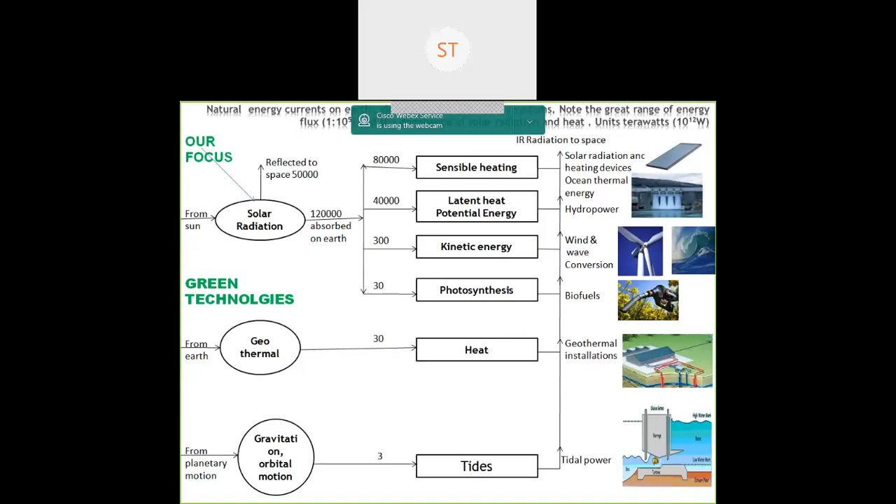What are the green technologies? It could be tidal power, could be geothermal installations, as shown here, or whatever derives from solar radiation - through sensible heating, solar PV or solar thermal energy conversion; through latent heat, potential energy, hydropower, wind, and so on through kinetic energy; through photosynthesis or biofuels. Our focus is going to be on solar PV.

Surendra sir, your voice is a little lower, sir. Okay. My voice is lower, is it? Yes sir, now it's fine, sir. Okay, somebody has given an annotation request. What is that? I request the participants please not to disturb the speaker and not to try any extra buttons here, please. Okay.

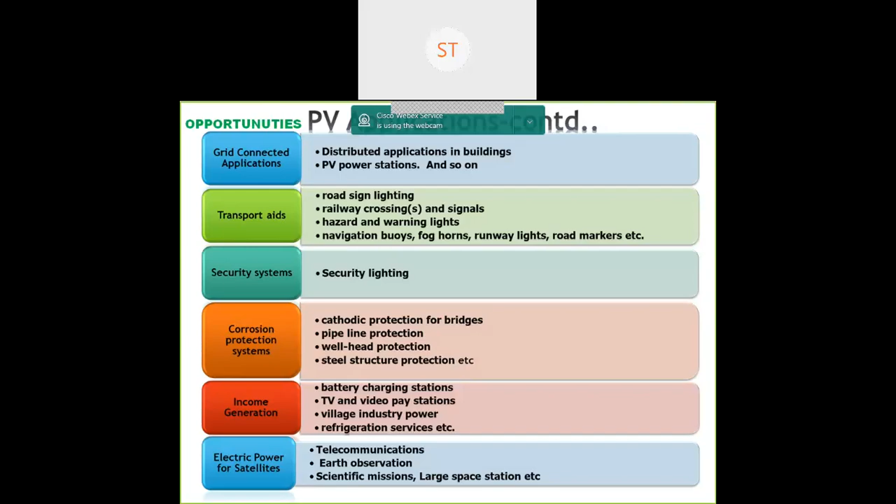Yes, for COVID-19 when they come up with a vaccine for the rural areas, well, you know where to store it. Communications - radio reporters, radio repeaters, remote TV and radio. Agriculture - we talked about irrigation, pumping, livestock. Some more opportunities in grid connected applications - government has announced 100 gigawatts. Transport aids, security systems, corrosion protection, income generation, electric power for satellites. So I think the opportunities are there everywhere.

The government has set a 100 gigawatt solar power target by 2022. The sectors being targeted are residential, commercial, industrial, and institutional. Of course, rooftop solar PV 40 gigawatts, solar parks 20 gigawatts, entrepreneurs and unemployed graduates 20 gigawatts, and ongoing programs at 20 gigawatts.

Various incentives are there - interest subvention, accelerated depreciation, subsidies, feed-in tariff, and so on. I think opportunities are galore.

If India has to meet this target of 175 gigawatts, you have to step up the pace in terms of installation. You have to beef up our facilities. You require more EPC contracts. That's where the market is.

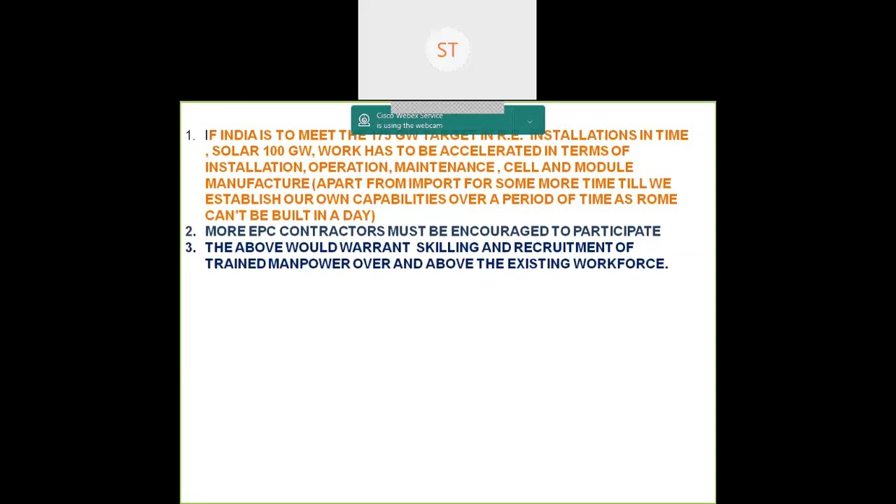But this will also involve skilling - a lot of skilling required, training required. So you'll have to train a lot of men. This would give a fillip to the trainers already there, skill development, skilling institutes. And all this would translate to enhanced job opportunity.

This is a great opportunity to make in India, with support from the government at the center and states. After all, China is what it is today only with government support in terms of financing and favorable policies.

I think big ticket manufacturers can start - especially Adani, Azure, Tata Solar, Indra, Reliance, and so on. India will also be able to meet her climate change obligations.

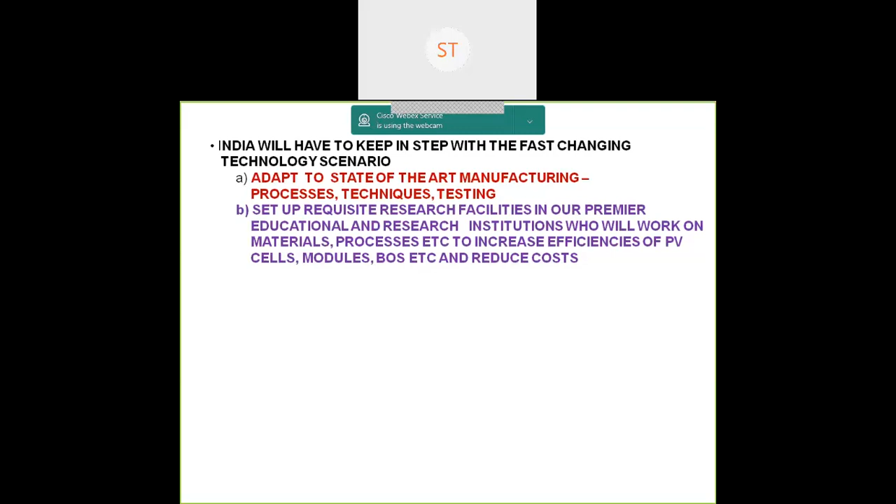But India will have to keep in step, sync with the fast changing technology scenario. You have to adapt to state of the art manufacturing techniques and processes. We have to set up requisite research facilities - educational and research on materials, processes. You have to encourage entrepreneurs.

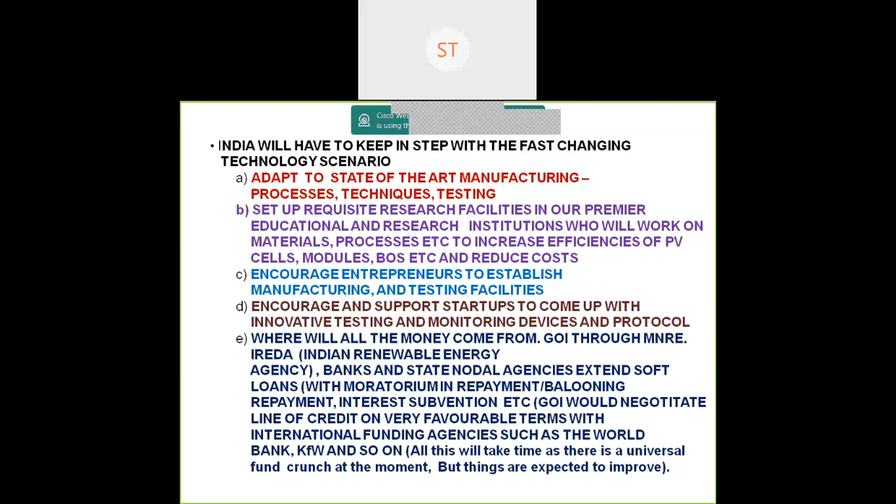Help or support - GOI, the Government of India, could negotiate line of credit on very favorable terms. The international funding agencies, such as the World Bank, KfW, and so on. All this may take time, could be a temporary fund crunch, but things are expected to improve.

The macro trends, opportunities for all - revamping and repowering. When you say revamping, after all, PV systems have been installed years and years ago, 25, 30 years ago. So obviously some subsystems, some components will be malfunctioning, right? These could be replaced, some things could be re-engineered, some of them could be off-spec. So here is an opportunity for revamping and repowering.

Utility scale storage - today, when you talk about grid connected systems, storage is important, has assumed significance. Storage plus grid connection. Obviously, battery technologies have got lithium ion, flow batteries, sodium ion. In fact, some party in India, in collaboration with somebody in UK, set up sodium ion.

Hybrid systems - already we hear of wind, solar, biomass, and so on. This is where someone who doesn't want to go and soil his hands in the field can use digitalization, which means big data analytics, artificial intelligence, IoT, Internet of Things, connected small objects, robotics.

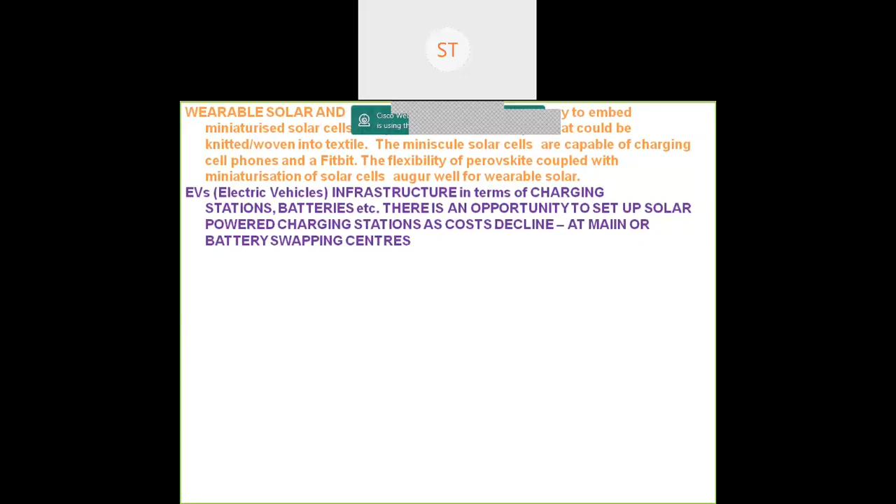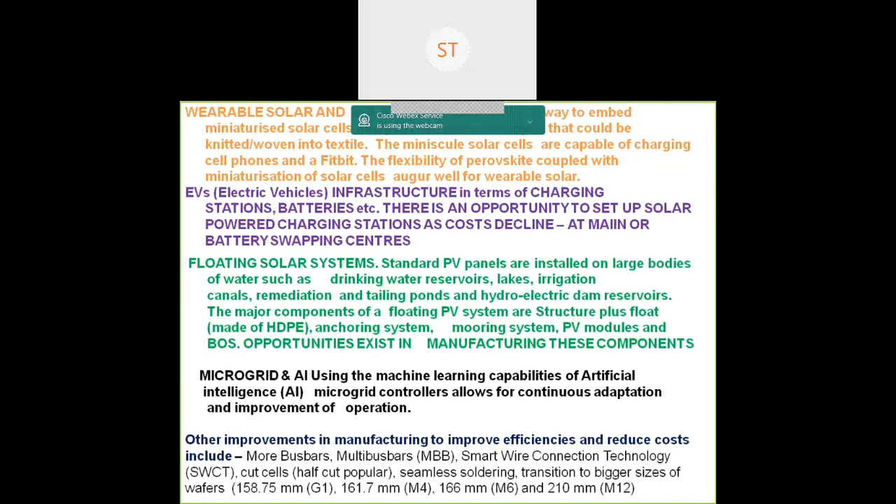Microgrids, artificial intelligence, and using the machine learning capability, AI. This has become the in thing today - AI, various things. When you talk about technologies, you're all aware of this.

PV module is silicon-based and non-silicon. Silicon, of course, could be crystalline silicon - monocrystalline silicon or polycrystalline. I will not go into details. Thin film could be amorphous silicon or multi-junction.

Today we are talking about heterojunction. This was pioneered by Sanyo long back - they talked about HIT cells, heterojunction with intrinsic thin layer, HIT. This means they have a crystalline silicon layer sandwiched between two amorphous layers. This gives very high efficiency. So today, a lot of effort is going into heterojunction - that could be the next best thing.

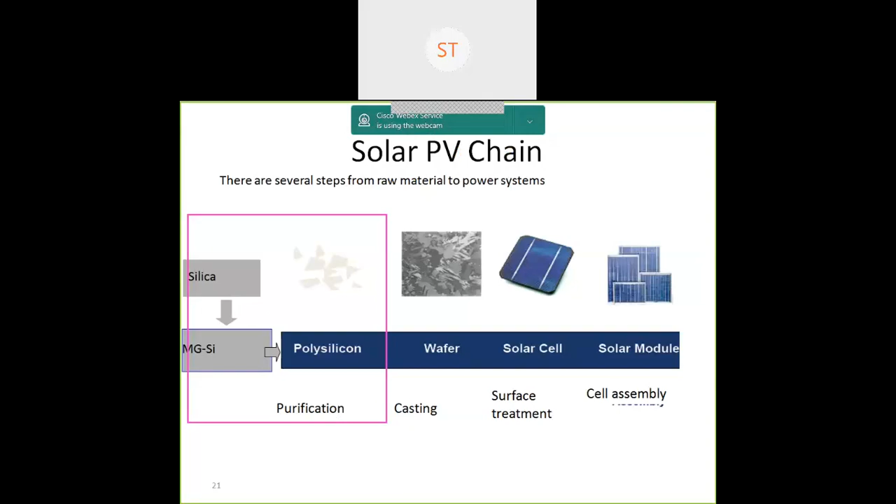So there are opportunities for all of you here. This is traditional wafer, cell, or module and so on.

So the question comes, what are the significant trends today? You all hear of PERC, passivated emitter rear contact monocrystalline cells. It gives you higher efficiency because it reduces recombination. This is used in conjunction with what is known as TOPCon, another way of passivating by introducing two other thin layers.

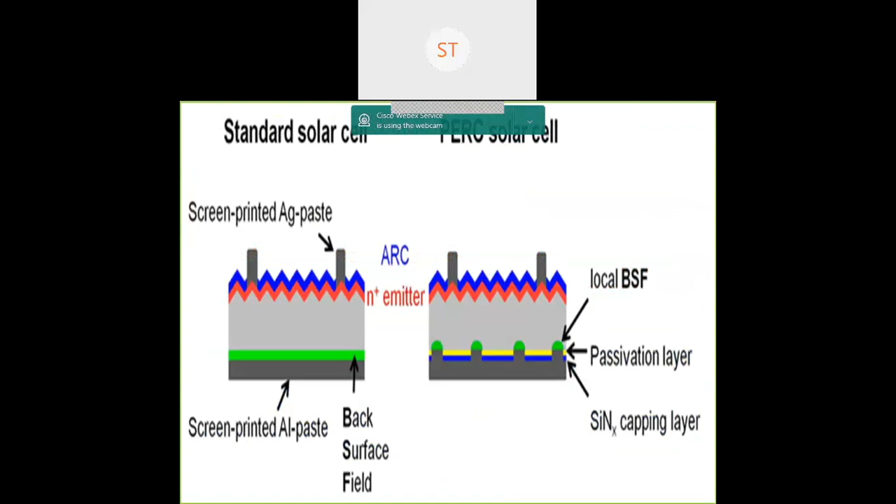Heterojunction we've talked about, Sanyo, Panasonic. Now, of course, the patent has expired, many people have jumped onto the bandwagon. China, Hungary, Italy, Japan, Russia, Taiwan, USA, Singapore. Just name it, they're there. This is to give you an idea of passivation that comes into play.

Now people today are talking about bifacial modules. So you can generate power from the front side, and now it also comes from the rear side.

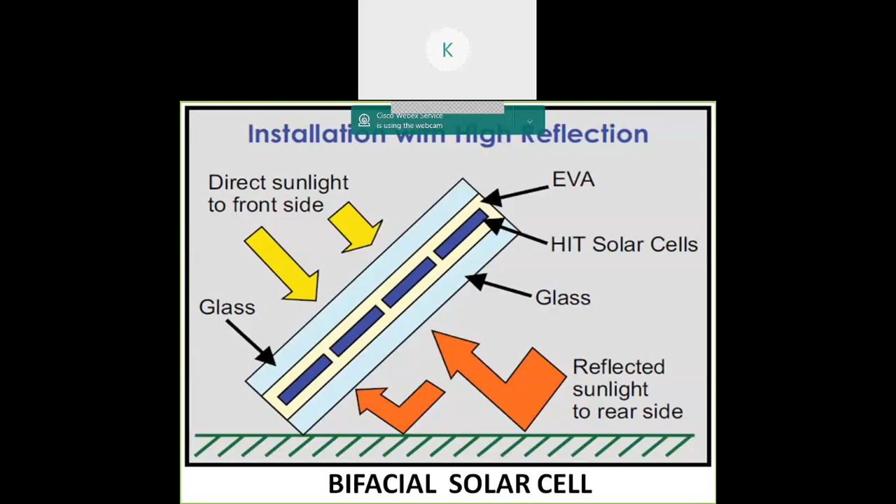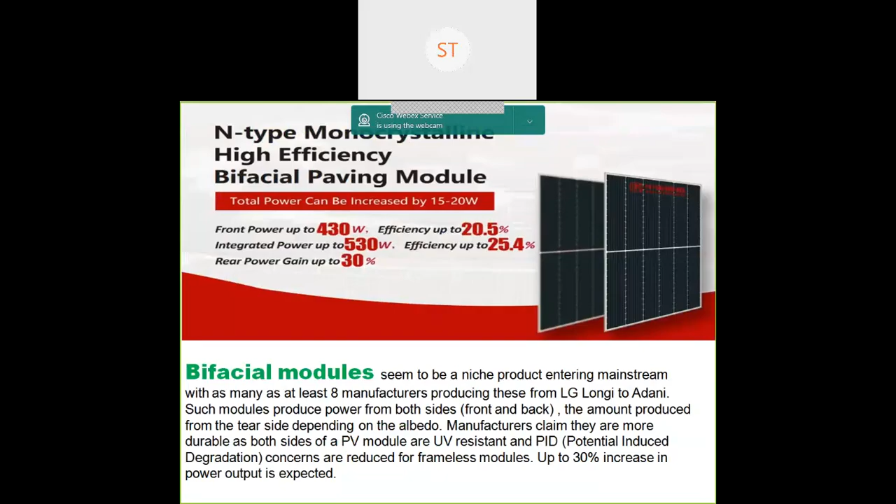Rear side, because you get the albedo, reflection from the ground. So both sides. The result: front power could be 430, integrated power could be 530. Efficiencies are 20.5 to 25.4.

My presentation will be incomplete if I don't mention perovskite, right? It is methyl ammonium lead halide - that's just one form, we later use iodide. This is going to be the future, I believe.

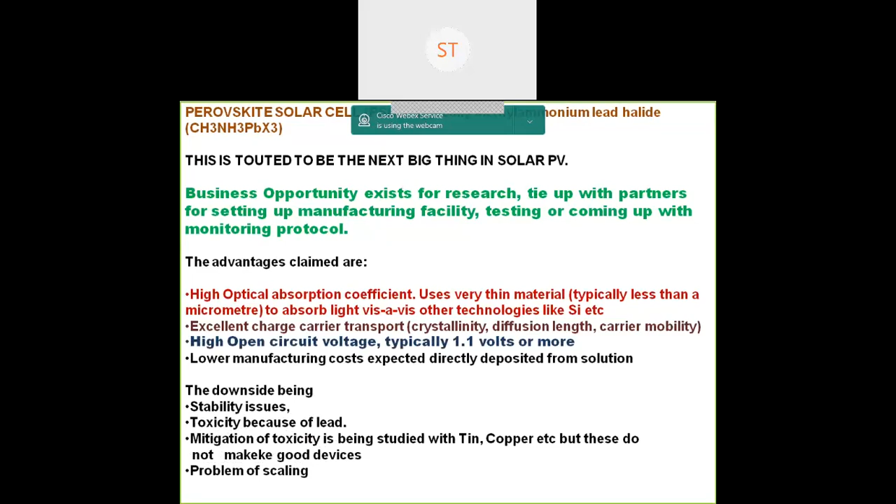But then there's always a downside which has to be addressed first: stability issues, toxicity issues, because you're talking about lead toxicity, problem of scaling. But these are being addressed in research labs. Very soon we're going to hear a lot more about perovskite in India as well.

You have a host of other technologies: dye sensitized solar cells, quantum dot solar cells, graphene based solar cells, tandem solar cells - meaning combination of perovskite and CIGS (copper, indium, gallium diselenide), perovskite and silicon, and so on. We are also talking about organic solar cells. Anybody interested in the details, you're welcome to contact me - I can give you references and even explain it to you if you're interested.

So the solar PV industry is experiencing plenty of changes across the entire value chain in terms of manufacturing, modules, materials, applications, O&M, decommissioning, and end-of-life management.

The new areas of application, apart from floating solar, is what is known as BIPV - building integrated photovoltaics. Solar trees is an interesting concept - you have a column, then you have stems, you have panels. They avoid shading; I think they call it phyllotaxy architecture.

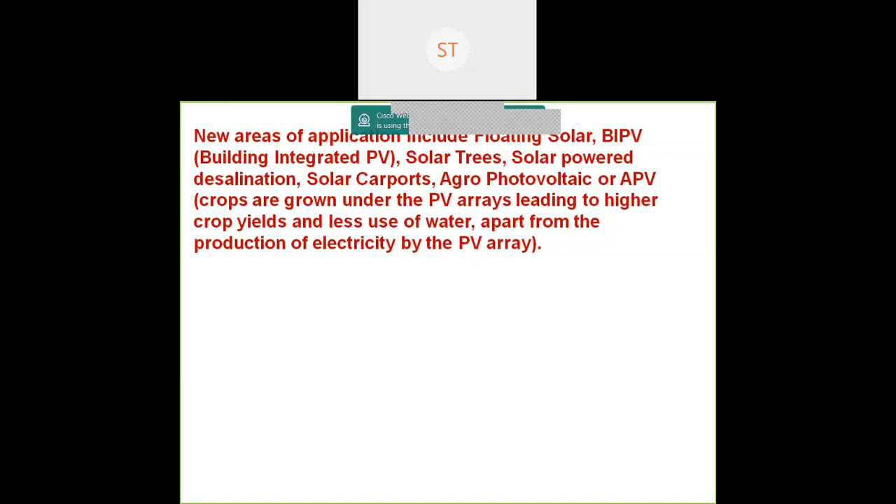Solar power desalination, carports, agrophotovoltaics - what is that? Crops are grown under the PV arrays. Yield is more, power is generated, you can feed it to the grid. So what happens? Farmer earns more. It's all farmer centric.

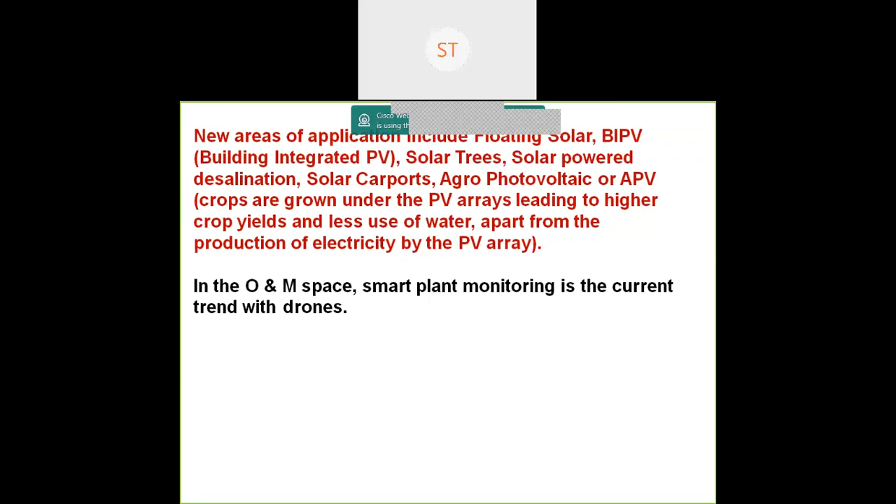In the O&M space, smart plant monitoring - I talked about IoT and so many things. I think digitalization is important. For power plant forecasting, IoT is a trend gaining wide acceptance, together with attempts for better and standardized communication.

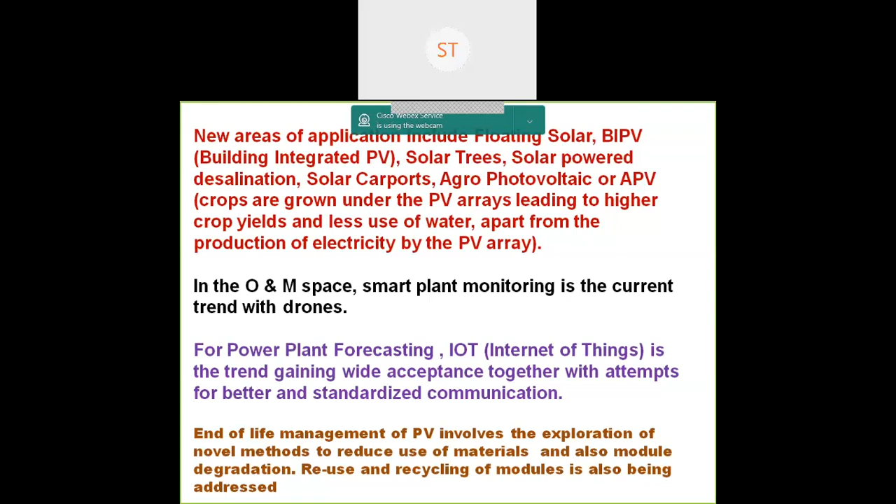We talked about end of life management of PV, right? You have to think of novel methods, reduce use of materials, also mitigate degradation somehow, and figure out how to reuse and recycle the module. This is in fact gaining a lot of momentum.

So in summary, post lockdown, it may take 2 to 3 quarters for some semblance of normalcy to be restored in terms of supply chains; workers' mobilization, all gone away, they have to be mobilized. You have to raise finances. Government have to be a little more liberal.

You have to get around bottlenecks, strategize partnerships and collaboration, get government approval, clear backlogs. It looks stupendous, but I think governments are out there to help. I heard the PM talk today about a 20 lakh crore package.

So I think once this transition is made, then we get back to business as usual for all manufacturers, system integrators, contractors. And business opportunities will abound, as I told you: setting up facilities by entrepreneurs, component manufacture apart from cell manufacture, and rendering software solutions, design.

PV plant performance monitoring, testing, EPC of power plants - just name it, it's there. Of course, the Government of India have announced ambitious targets for RE capacity addition, so there's ample opportunity for all of us. Wind and solar generation, energy, and of course due to problems of intermittency and fluctuations, battery energy storage has become very important.

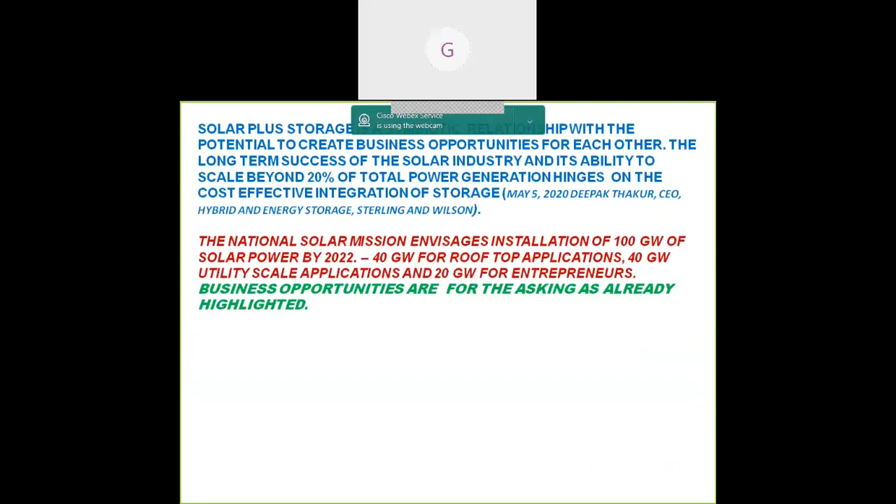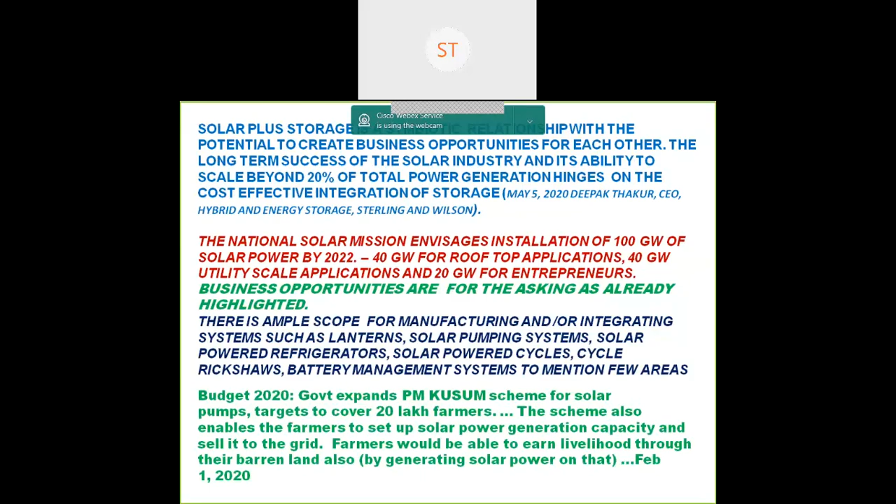So they say business opportunities are there for the asking. Solar plus storage we talked about, National Solar Mission we talked about. Scope for all these places: lanterns, pumping systems, solar powered refrigerators, e-cycles, e-auto rickshaws, battery management systems. And then of course, 20 lakh farmers to be given solar power, solar pumps. That's the PM Kusum program. So the farmers set up the solar power generation capabilities. We talked about agri PV. They can also sell part to the grid.

As a young citizen of India, armed with technology and love for my nation, I realize small aim is a crime. As entrepreneurs, startups, business people, think big, dream big. That is what Dr. Kalam had said.

So I think India is poised for the big leap in green technologies, particularly solar. Business opportunities - we talked about almost every sphere, every facet, right from research to installation, operation, maintenance. So I think it's time for entrepreneurs, startups, all of us to gird up our loins and embark on this fascinating travel into green technology. Mind you, India is looked upon with great respect world over for our initiatives in green technology. Yes, that's Bharat Ratna Abdul Kalam's quote I used.

Coming to this particular slide, this is the wake up call to set up more manufacturing facilities in India. India has set an ambitious target of adding 100 gigawatt of solar energy by 2022, and so far achieved only 34 gigawatt. Now due to this COVID-19 pandemic, it has been a wake up call for the domestic solar industry as it is heavily dependent on imports, but domestic manufacturing can be sustained only if there is profitability.

So here I would like to discuss: actually about 80 to 90% of solar materials we are importing from other countries, majority from China. During this COVID period, all the import exports have been stopped. Now domestic solar panels or whatever the things, domestic demand is increasing day by day. As much as 80% of the demand for solar cells and modules is met by imports from Chinese companies.

Therefore, the imposition of work restrictions by China due to this corona situation means all the materials have been stopped. The developers are facing a shortfall of raw materials, which is going to affect the installations in the first half of the coming year. Now a few companies have already opened, trying to install the solar system, but they are not able to get materials like inverters. There are no inverters available in the market. We have panels, we have some panel assembling units, but inverters and other materials are not available.

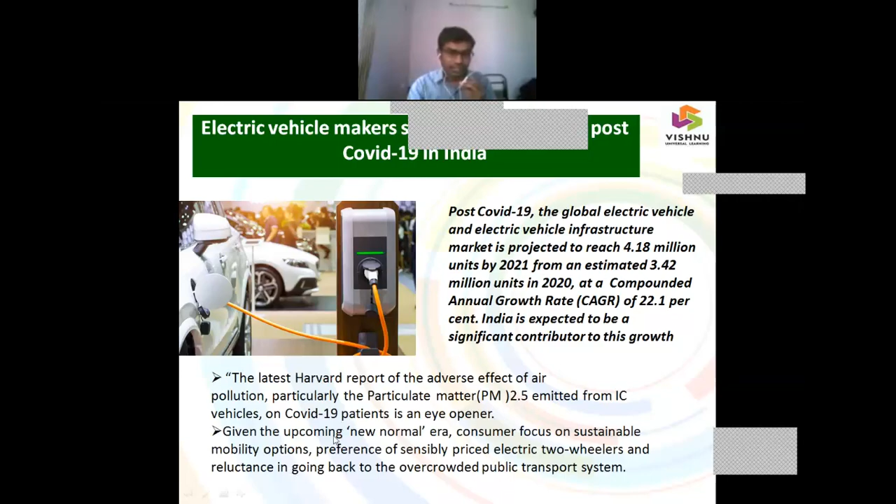Just look at this particular slide, sourced from a Frost & Sullivan Research Consulting report. Here you can see the market size of the EV components industry in India by 2025. This electric vehicle value chain in India is expected to reach $4.8 billion by 2025. I'm considering four major components here. For whatever electric vehicles we are talking about now, 80 to 90% of components are being imported from other countries. There is no components manufacturing in India.

Yesterday you may have heard Prime Minister Modi's words. He clearly mentioned that local manufacturing is very important, and we are going to encourage more and more local manufacturing. So here you can consider electric motors, batteries, power electronics, and charging stations. This is the expected business opportunity in India.

Here you can see the key trends. One third of the EV motor market will emerge from demand in EV buses in India by 2025, and 67% will be the passenger car segment share of the battery market by 2025.

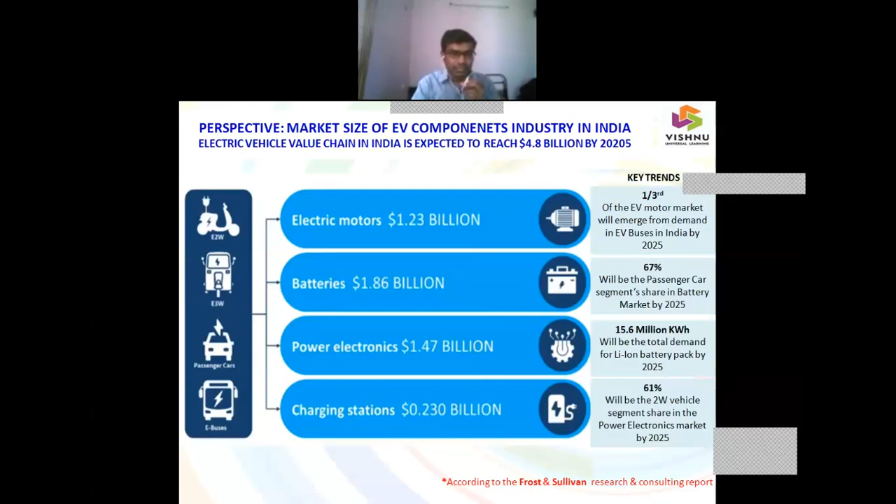61% will be the two-wheeler vehicle segment share in the power electronics market by 2025. So here we, as researchers, system developers, and even students, can concentrate on making controllers, charge controllers, and charging stations. You can apply whatever technology you've learned to start a startup and continue. There is a big market in India.

Coming to the solar plus storage segment, we will see a major boost in the renewable energy market. At present we are concentrating only on grid-connected systems. Of the 34 gigawatts I mentioned today, 90-99% is grid-connected. But the new trend is solar plus storage systems, which we will see more in future. Government policy is focused towards solar plus storage systems, also seen through the hybrid policy now in place, and in the recent award of renewable energy projects with storage capacity.

Yesterday, I believe Renew Power got almost a 1.5 megawatt solar plus storage system project from SECI.

In the next 6 months to a year, a lot of focus will shift to grid-independent systems. Whatever we are talking about regarding DC microgrid or microgrid systems, solar plus storage systems are going to play a major role. The role of storage systems in the form of technologies such as solar plus storage will be huge, and there is likely to be a boom in rural or off-grid solar systems. Particularly in the rural sector, solar plus storage is a very good option.

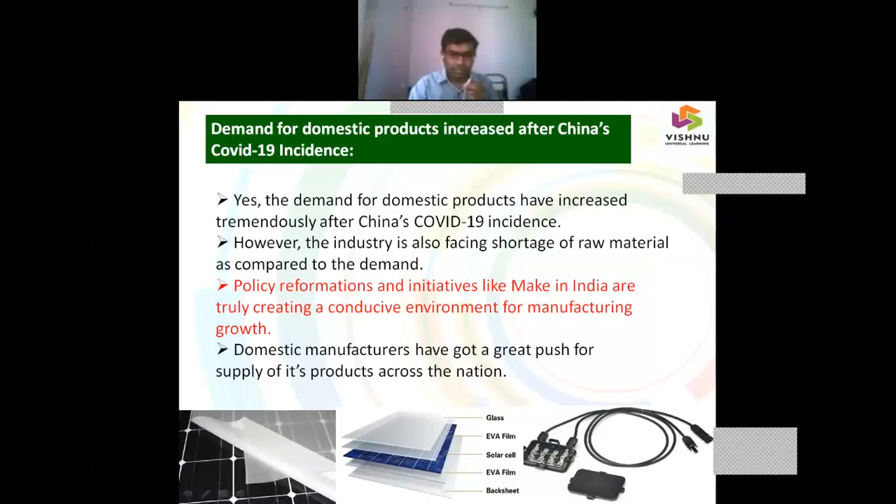Yes, the demand for domestic products have increased tremendously after China's COVID. However, the industry is also facing shortage of raw material as compared to the demand. And policy reformations and initiatives like Make in India are truly creating a conducive environment for manufacturing growth. So domestic manufacturers have got a great push for supply of its products across the nation. So we can have major facilities.

So just one minute, I'll close here. So with this, this is my last slide. I'll close with this quotation: our development of photovoltaics is something that I feel is a mission, not just technical or scientific research. I believe it is the only energy source that can save mankind in the 21st century. You can also look into this particular thing.

Everybody has some ideas. India has 1.3 billion population, everybody should be having ideas, but you don't get rich for having ideas. You get rich making them a reality. So if we can turn at least one idea into reality, that is sufficient to establish the business.

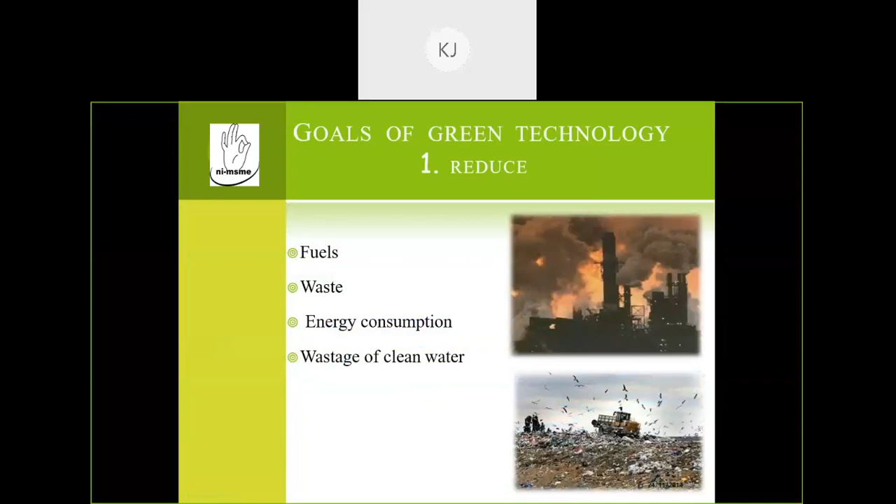Goals of green technology, number one, reducing. Due to dwindling sources of renewable energy resources, fuels, waste, energy consumption, wastage of clean water, and whatever discharges come from various industrial sectors - MSMEs, where Hyderabad is the pharmaceutical hub, where pharmaceutical intermediate drug manufacturing units, more than 450 units, exist in Telangana state. It leads to wastage of wastewater as well as waste residues.

Renewing energy: wind energy, hydro energy, solar energy, biofuel - whatever the biological material, waste, discarded materials will be converted into value addition of products, biofuels, and wastewater which is discharged from various industrial sectors.

Refuse the use of plastic bags and show the seeds of change. Make your way to green technology. We are at the forefront for the next future generation. We would like to highlight refusing materials in such a green model.

Responsibility: don't waste electricity, switch off electrical equipment when not required. Don't waste water, never leave taps open while brushing or washing dishes. Don't waste fuel, don't waste food material, don't cook extra food and throw it away. Always keep in mind that there are millions in the world starving without food materials.

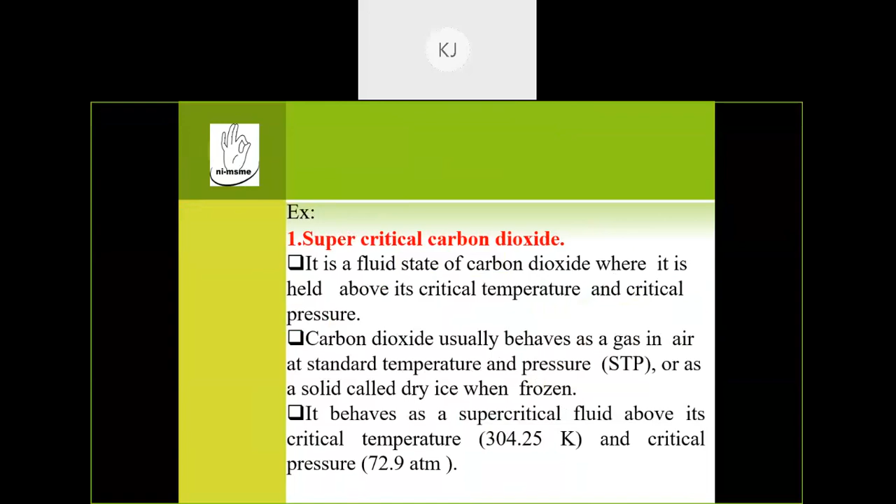For example, supercritical carbon dioxide - it is a fluid state of carbon dioxide where it is held above its critical temperature and critical pressure. Carbon dioxide usually behaves as a gas in air at standard temperature and pressure (STP), or as a solid called dry ice when in frozen condition. It behaves as a supercritical fluid above its critical temperature of 304.25 Kelvin and critical pressure of 72.9 atmospheres.

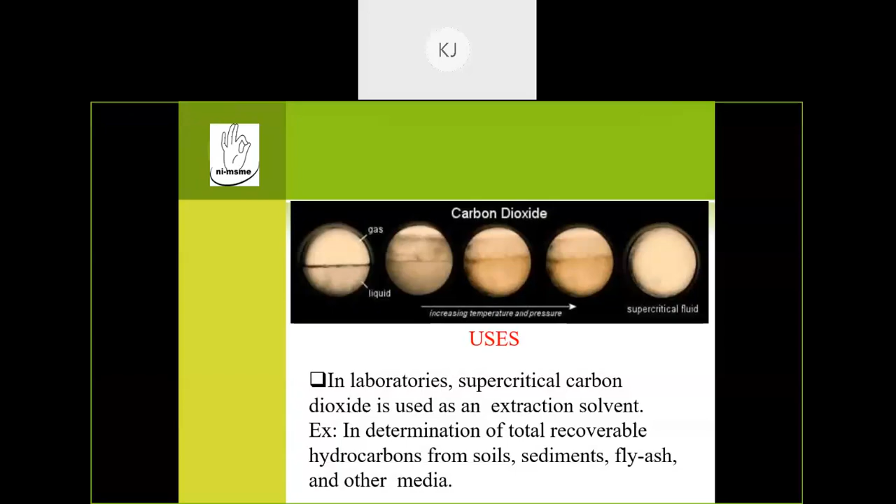What are the uses? Carbon dioxide is normally used in laboratories. Supercritical carbon dioxide is used as an extraction solvent in determination of total recoverable hydrocarbons from soils, sediments, fly ash, and other media.

Supercritical carbon dioxide can also be used as a more environmentally friendly solvent for dry cleaning purposes. What are the principles of green technology?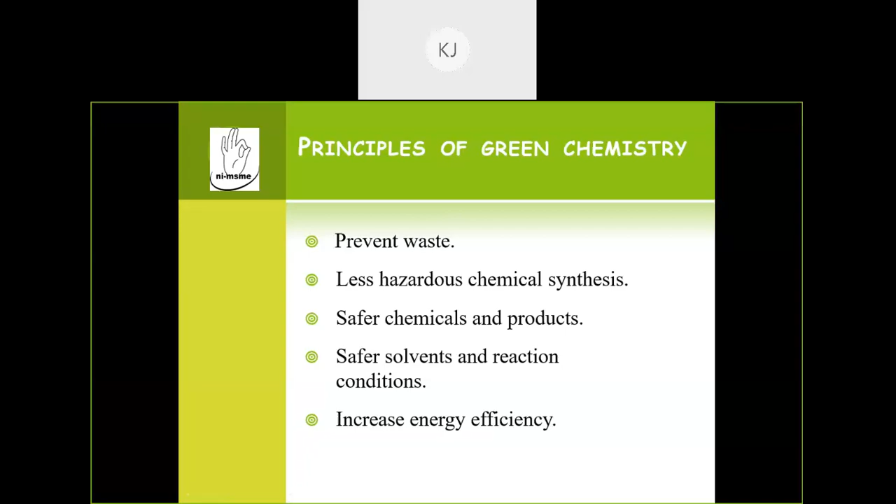Principles of green chemistry: preventing waste, less hazardous chemical synthesis, safer chemicals and products, safer solvents and reaction conditions, increase energy efficiency. We would like to focus more on increasing energy efficiency.

We're coming to Design for Environment, called DFE. The Environmental Protection Agency's Design for the Environment works in partnership with industry, environmental groups, and academia to reduce risk to people and the environment by finding ways to prevent pollution.

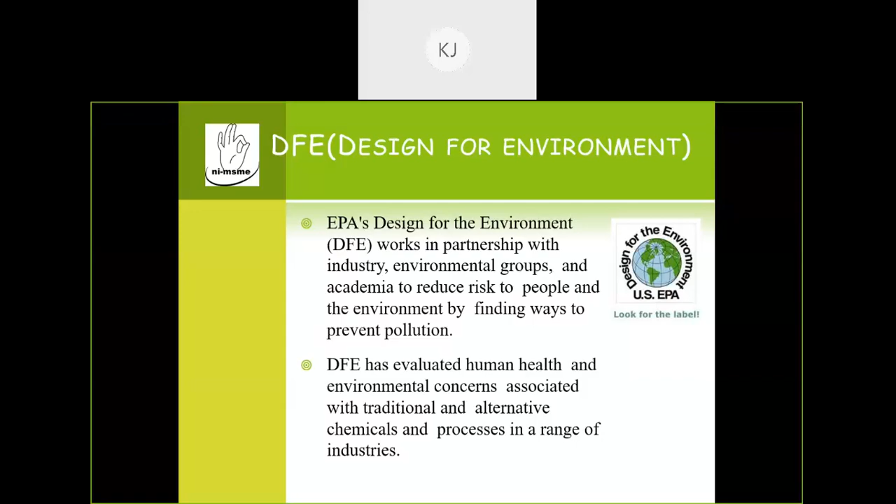What does this mean? DFE has evaluated human health and environmental concerns associated with traditional and alternative chemicals and processes across a range of industries.

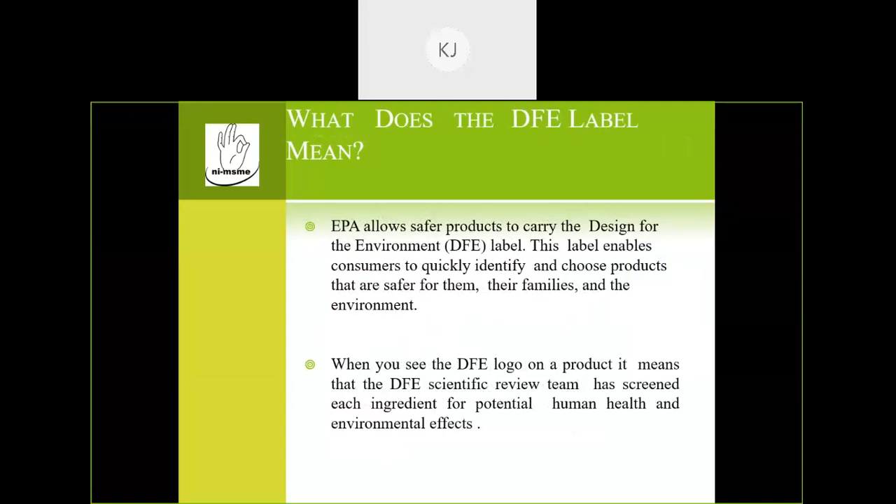What does the DFE label mean? The Environmental Protection Agency allows safer products to carry the Design for the Environment label. This label enables consumers to quickly identify and choose products that are safer for them, their families, and the environment. When you see the DFE logo on your product, it means the DFE scientific review team has screened each ingredient for potential human health and environmental effects.

Identification of safer chemicals - how do we identify safer chemicals available in the market? Green chemicals are marked with different kinds of barcoding activities as well as symbols, like the green circle. If you look at the slide, you will find a green circle.

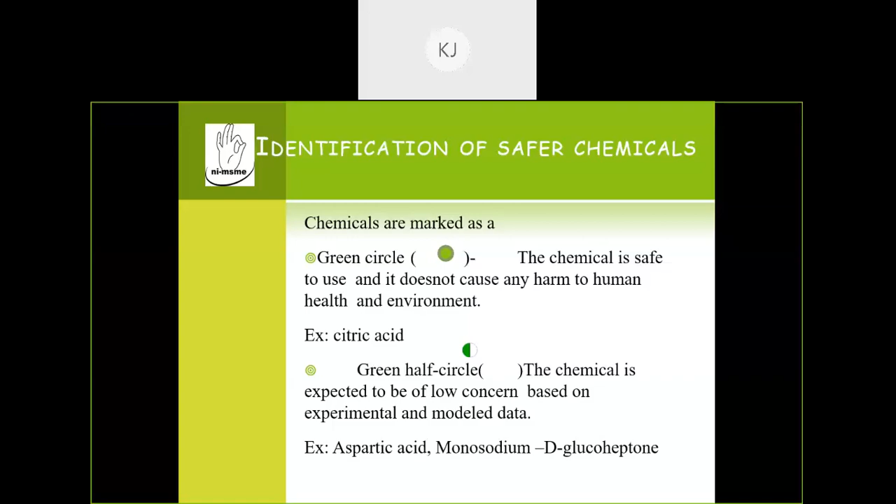The chemical is safe to use and does not cause any harm to human health and environment. Example: citric acid. The green half circle indicates the chemical is expected to be of low concern based on experimental and modeled data. Examples: aspartic acid, monosodium glucoheptonate.

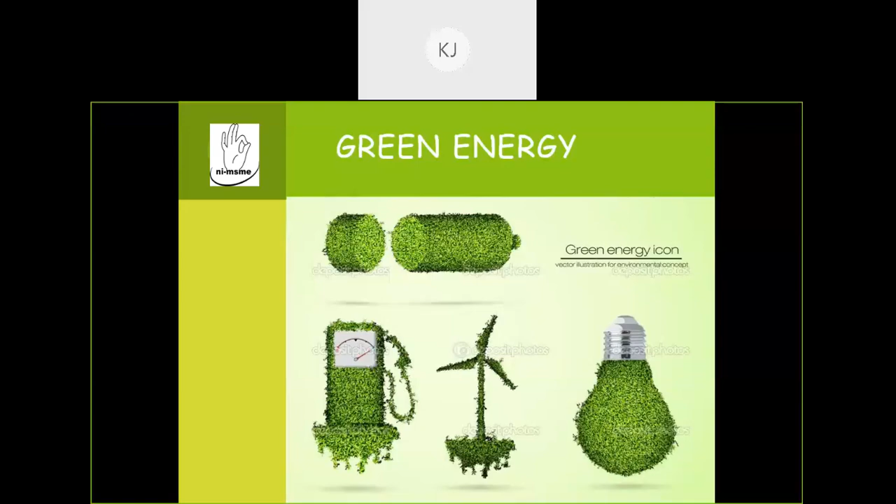Green energy - whatever energies are utilized from different sources will be converted into green aspects. Green energy comes from natural sources such as sunlight, wind, rain, tides, plants, algae, and geothermal heat. These energy resources are renewable energy resources. Types of green energy include solar energy, wind energy, hydro energy, geothermal energy, biofuel, and biogas.

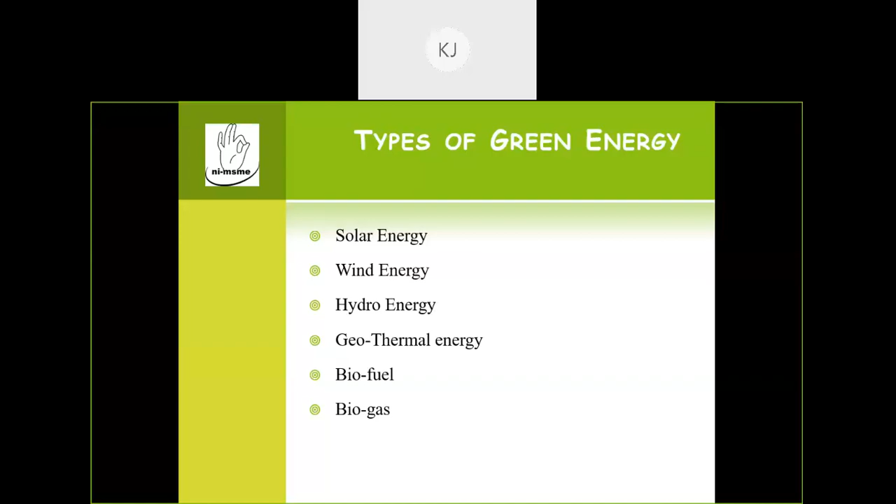These types of green energy - I would like to focus on each one individually in a systematic, chronological order.

Come to first point, solar energy. Solar energy is the conversion of sunlight into electricity, either directly using photovoltaics or indirectly using concentrated solar power, called CSP. It can be used for pumping water, refrigeration purposes, communication, and charging batteries.

In 1955, the first solar car invented was a tiny 15-inch vehicle created by William G. Cobb of General Motors, called the Sun Mobile.

Samsung India launched the first solar-powered phone, the Solar Guru 1107 model, which allows users to charge the phone anywhere the sun is shining. One hour of solar charging gives you 5 to 10 minutes of talk time. That is the only model which was such an innovative activity.

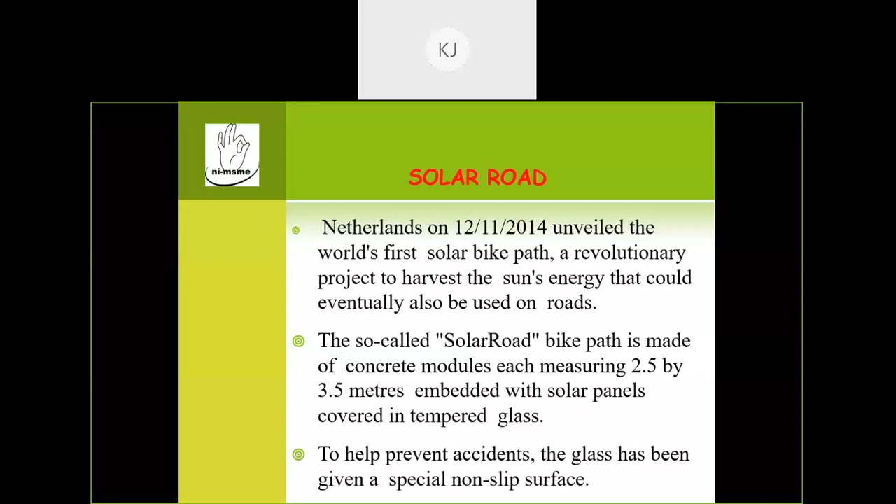Solar Road, Netherlands, on November 12th, 2014, unveiled the world's first solar bike path. It's a revolutionary project to harvest the sun's energy that could eventually also be used on roads. The so-called Solar Road bike path is made of concrete modules, each measuring 2.5 by 3.5 meters, embedded with solar panels covered in tempered glass material. To help prevent accidents, the glass has been given a special non-slip surface.

Come to the second part, wind energy. Wind turbines convert the kinetic energy in the wind into mechanical power that runs a generator to produce clean electricity. Wind energy contributes only 1% of global electricity generation.

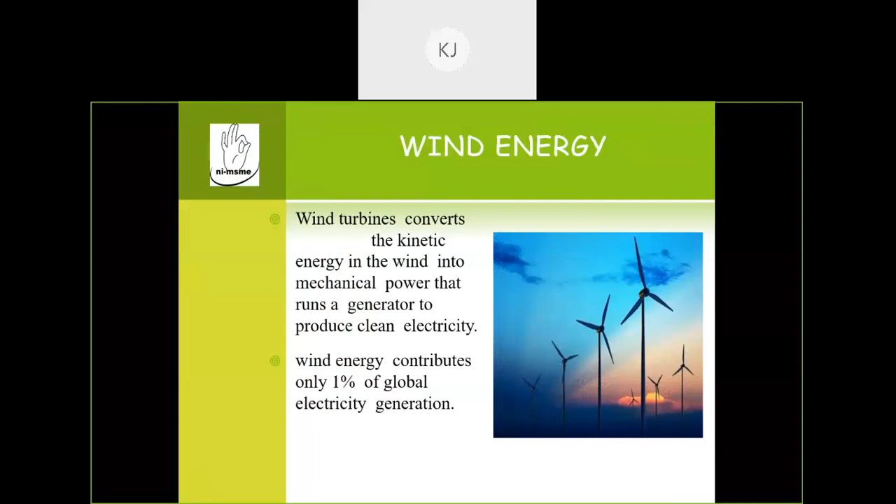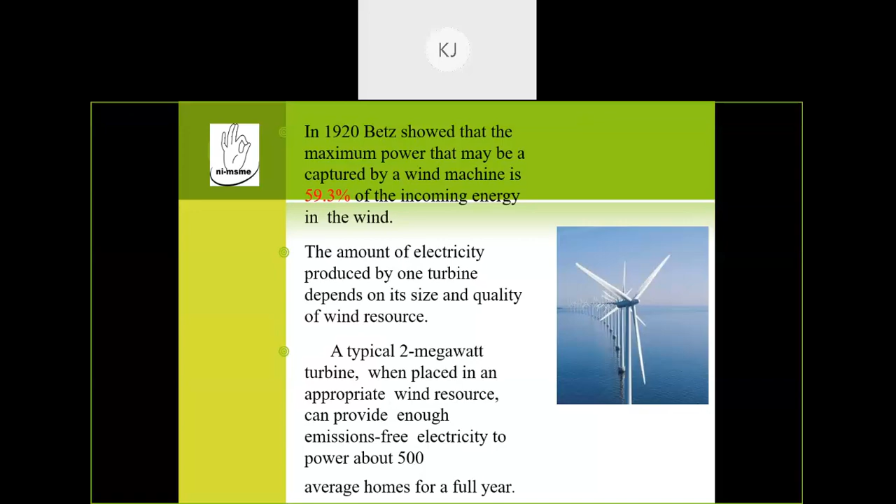In the year 1920, Betz showed that the maximum power that may be captured by a wind machine is 59.3% of the incoming energy in the wind. The amount of electricity produced by one turbine depends on its size and the quality of the wind resources. A typical 2 megawatt turbine, when placed in an appropriate wind resource, can provide enough emissions-free electricity to power about 500 average homes for a full year.

Come to the third one, hydro energy, hydroelectricity. Hydroelectricity uses the energy of running water to make electrical energy. Hydroelectric stations are built where running water is stored.

Fifth one is wave power. The waves are generated by the wind as it blows across the sea surface. Energy is transferred from the wind to the waves. Wave energy has the potential to be one of the most eco-friendly forms of electricity generation.

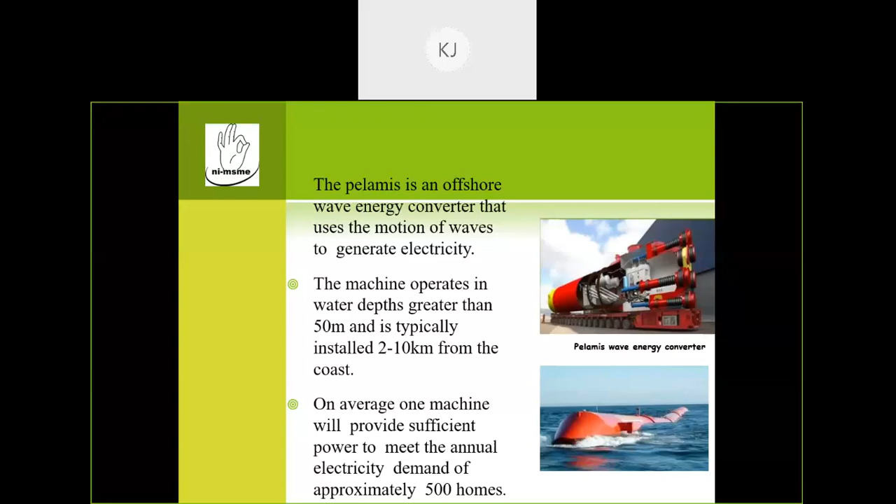The Pelamis is an offshore wave energy converter that uses the motion of waves to generate electricity power. The machine operates in water depths greater than 50 meters, and it is typically installed 2 to 10 kilometers from the coast. On average, one machine will provide sufficient power to meet the annual electricity demand of approximately 500 homes at one location. Final one is geothermal energy.

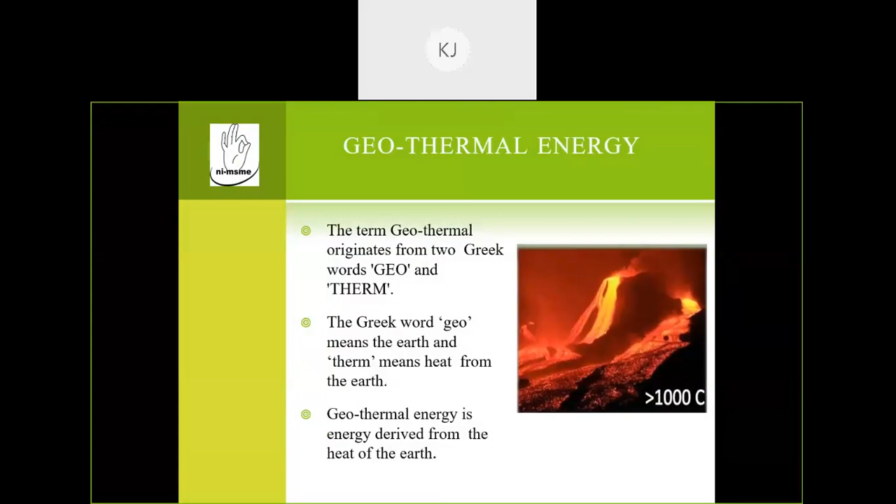The term geothermal originates from the two Greek words geo and therm. The Greek word geo means earth and therm means heat, so geothermal means heat from the earth. Geothermal energy is energy derived from the heat of the earth, from the interior regions of the earth's crust.

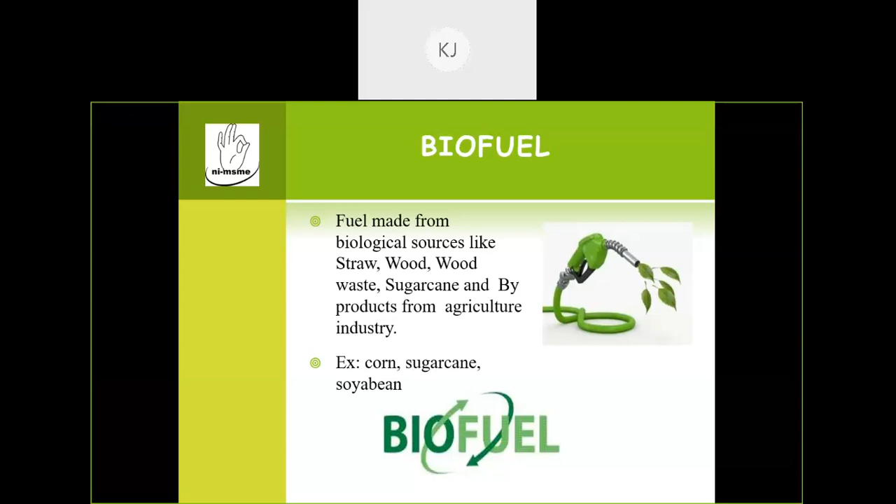Biofuel is a fuel made from biological sources like straw, wood waste, sugarcane, and byproducts from the agriculture industry. Examples include corn, sugarcane, and soybean, and so on.

Green information technology, this is the way we would like to utilize these sources as a green information technology terminology. Green IT is also called green computing. It describes the study and use of computer resources in an efficient way. Green IT starts with manufacturers producing environmentally friendly products and encouraging information technology departments to consider more friendly operations options like virtualization, power management, and proper recycling habits.

Let us see the photograph shown in the slides, the green building concept.

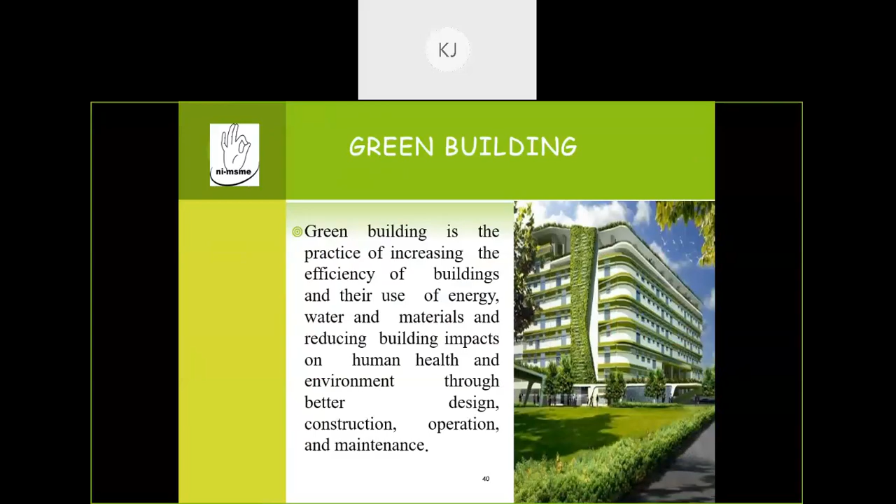Green building is the practice of increasing the efficiency of buildings in their use of energy, water, and materials, and reducing building impacts on human health and the environment through better design, construction, operation, and maintenance.

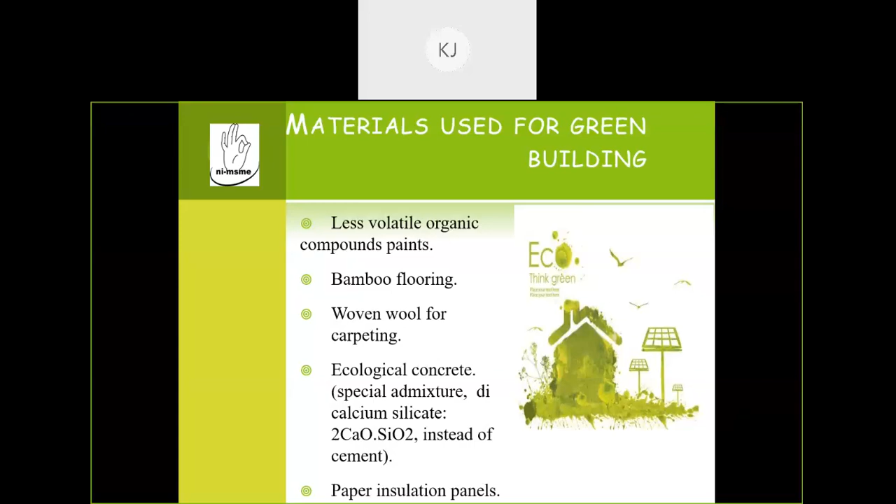Materials used for green building include low volatile organic compound paints, bamboo flooring, woven wool carpeting, ecological concrete with special admixtures like dicalcium silicate instead of cement, and paper insulation panels, among others.

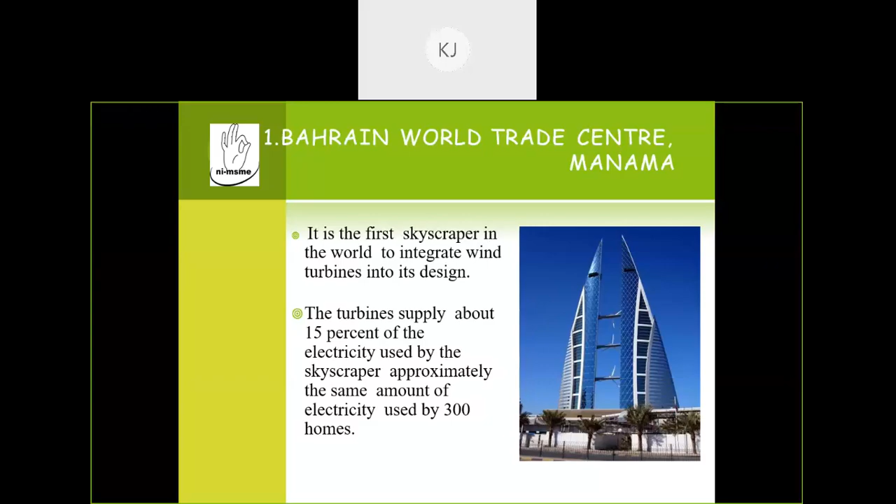Look at the photograph shown in the slide. The turbines supply about 15% of the electricity used by the skyscraper, approximately the same amount of electricity used by 300 homes within that skyscraper.

Skyscraper farming is a futuristic concept that converts a skyscraper into crop farms, which could help reduce global warming, improve the urban environment, and help feed the world's growing population.

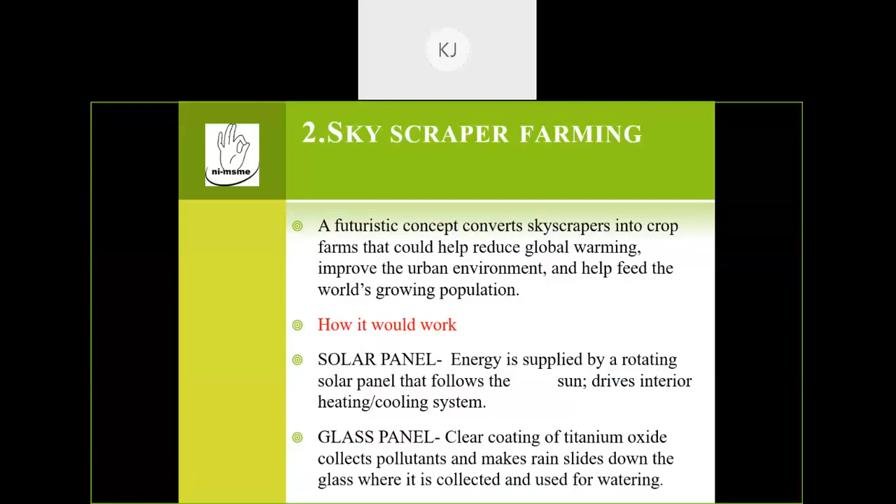How it works: solar panels as well as glass panels. Energy is supplied by the rotating solar panel that follows the sun, driving the interior heating and cooling system. The glass panel has a clear coating of titanium oxide that collects pollutants, and rain slides down the glass where it is collected and used for watering.

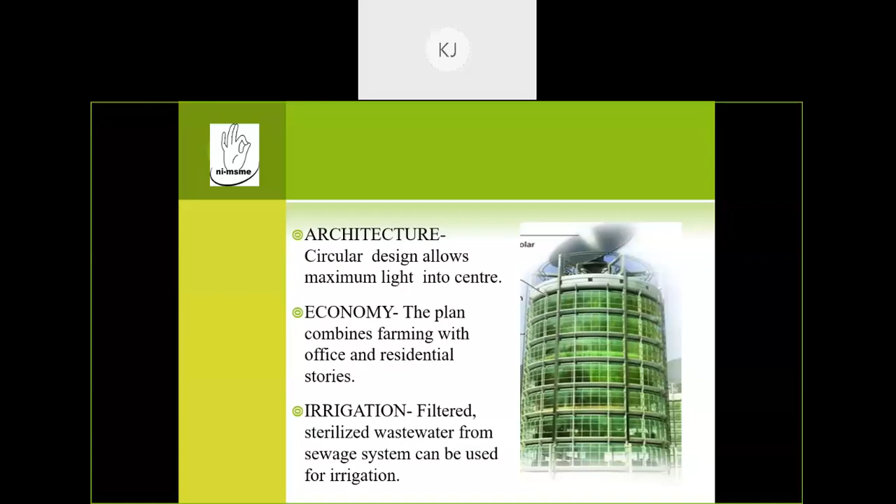The architecture has a circular design that allows maximum light into the center. Economically, the plan combines farming with office and residential spaces. For irrigation, filtered, sterilized wastewater from the sewage system can be used.

India Tower, Mumbai, formerly known as the Park Hyatt Tower, is a 74-story, 301-meter tall mixed use residential and hotel tower that has officially begun construction. This 8,82,000 square foot tower has set a number of records, ranging from Mumbai's tallest to India's first super-tall to India's greenest skyscraper. Solar shading, natural ventilation, day lighting, and rainwater harvesting are all used in this building's components.

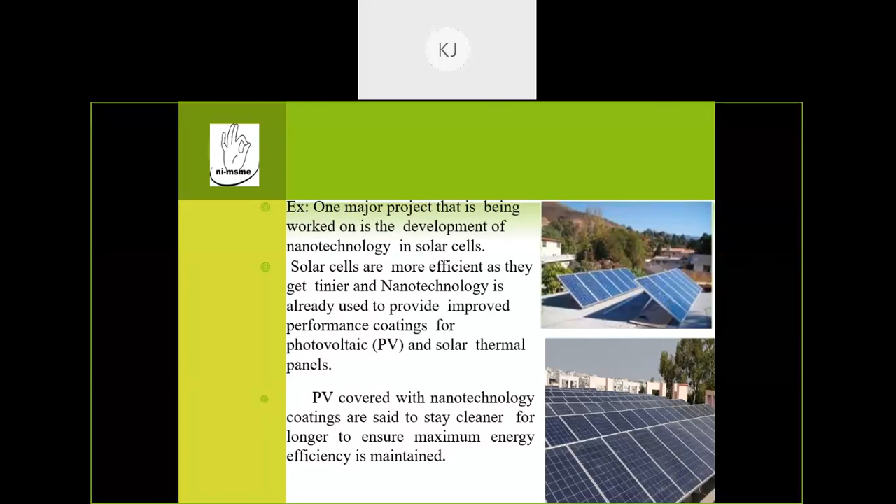Let us take an example. One major project being worked on is the development of nanotechnology in solar cells. Solar cells are more efficient as they get tinier, and nanotechnology is already used to provide improved performance coatings for photovoltaics and solar thermal panels. Photovoltaics treated with nanotechnology coatings are said to stay cleaner for longer, ensuring maximum energy efficiency is maintained at all levels.

What do we mean here? We would like to discuss the rating system, LEED - Leadership in Energy and Environmental Design. The United States Green Building Council created this program called Leadership in Energy and Environmental Design.

These are the 5 key areas: sustainable site development, water savings, energy efficiency, material selection, and indoor environmental quality. These are the 5 components covered under the category of LEED, Leadership in Energy and Environmental Design.

The certified rating is 29 to 36 points, silver is 37 to 43 points, and gold is 44 to 57 points. These are all the symbols - the logo should be highlighted over there at their plants.

Let us check some examples of environmentally friendly constructions and vehicles. The Suzlon Energy Limited, located at Pune, Maharashtra, is ranked as the world's 5th largest wind turbine supplier. It has been LEED Platinum rated and certified as an eco-friendly building by the Green Building Council, built to perfection on an area of 41,000 square meters, 10.13 acres of land.

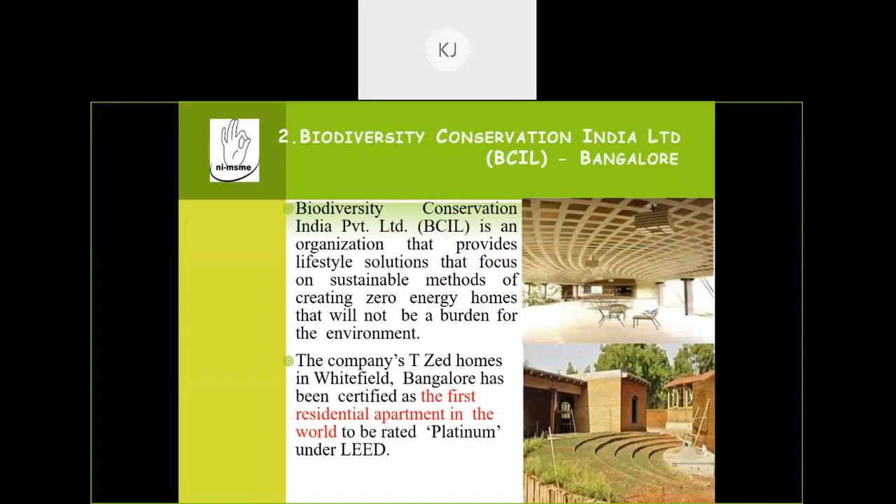Biodiversity Conservation India Limited, called BCIL, Bangalore, is an organization that provides lifestyle solutions focused on sustainable methods of creating zero energy homes that will not be a burden on the environment. The company's TZed Homes in Whitefield, Bangalore has been certified as the first residential apartment in the world to be rated Platinum under LEED.

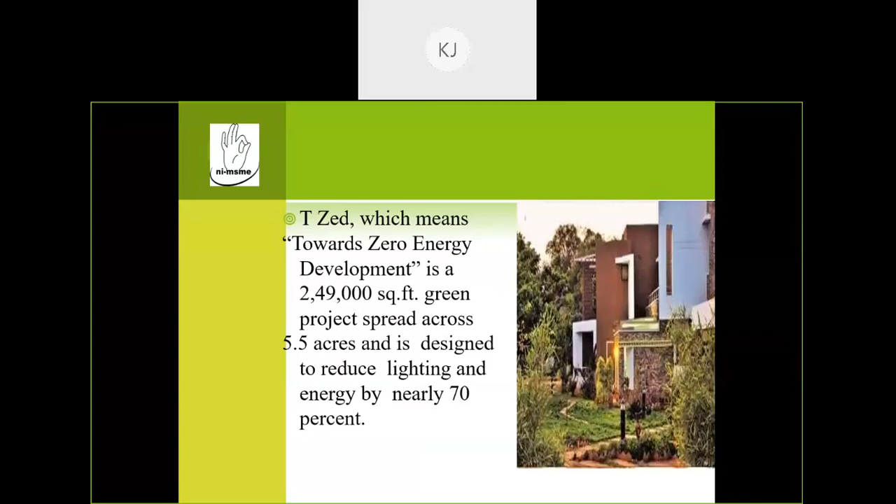T Zed, which means towards zero energy development, is a 2,49,000 square feet green project spread across 5.5 acres, designed to reduce lighting and energy consumption by nearly 70%.

Rajiv Gandhi International Airport, the Hyderabad brand ambassador, is India's first greenfield airport, undeniably among the top 10 green buildings in India, and the first airport in Asia to be awarded LEED silver rating certification by the United States Green Building Council. It features a 105,000 square meter glass encased terminal. This green building ensures optimal use of natural light and minimal wastage of electricity and energy consumption. Among its other green features is the recycling of treated wastewater for landscaping, air conditioning, and flushing requirements.

Nokia Gurgaon, located in the state of Haryana, is among India's most sustainable buildings, the corporate office of Nokia, which has been granted accreditation as one of the world's leading green buildings by the US Green Building Council, USGBC. It has the LEED Gold rating, and is a commercial interior fit-out project in India being awarded in the green building category. What makes this green office stand out is its smart lighting and ventilation systems, high efficiency chillers, high performance double glazing, heat recovery wheel, green guard certified furniture, and online carbon dioxide monitoring system.

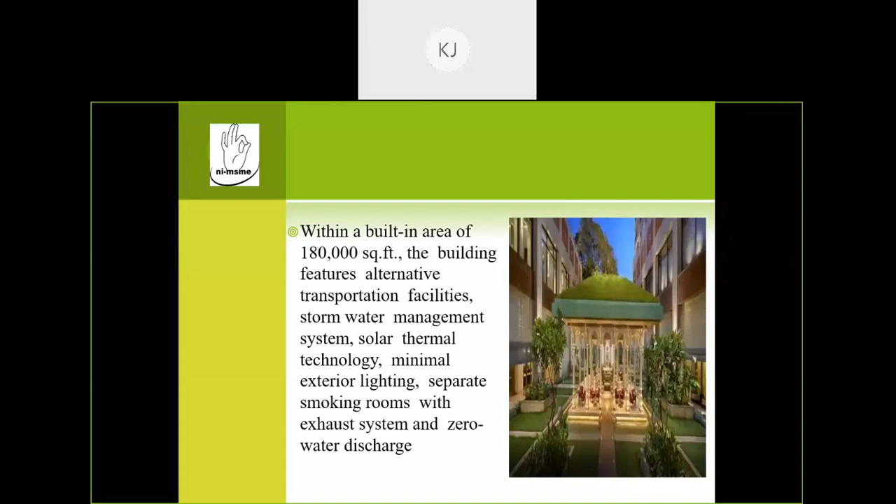ITC Green Center, located again at Gurgaon, Haryana state, is considered one of the early adopters of the green building movement in India, and is still considered a benchmark for green buildings. It was the first platinum rated building in India, with a built-up area of 1,80,000 square feet. The building features alternative transportation facilities, a stormwater management system, solar thermal technology, minimal exterior lighting, separate smoking rooms with exhaust systems, and zero water discharge.

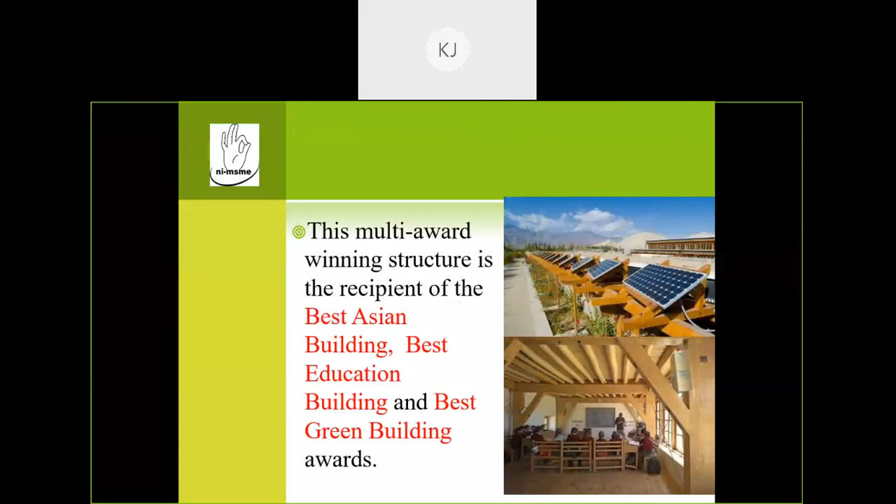The Druk White Lotus School at Ladakh, in this desert landscape severe climatic condition 3,500 meters above sea level, was built as a modest school that is regarded as an outstanding example of sustainable, green, cost-effective building development. This multi-award winning structure is a recipient of Best Asian Model, Best Asian Building, Best Education Building, and Best Green Building Awards.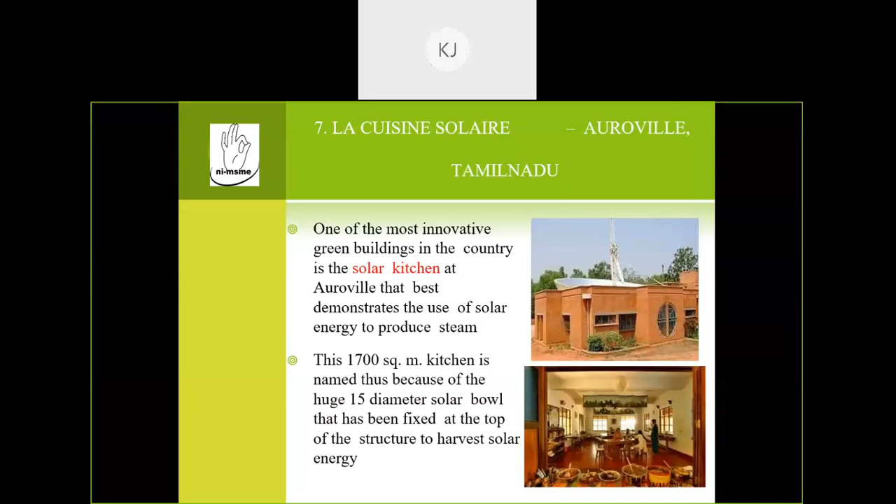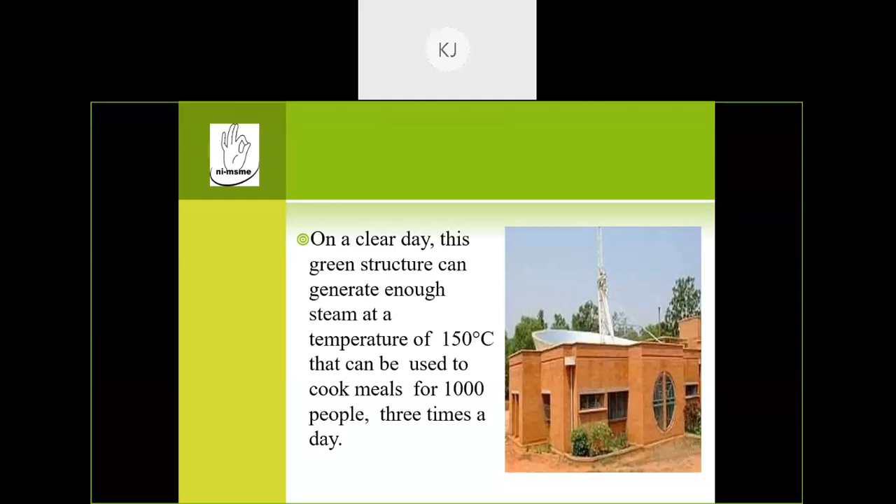The Solar Kitchen at Auroville in Tamil Nadu state best demonstrates the use of solar energy to produce steam. It is around 1700 square meters. The kitchen is named thus because of the huge 15 diameter solar bowl fixed at the top of the structure to harvest solar energy. On a clear day, this green structure can generate enough steam at a temperature of 150 degrees centigrade to cook meals for 1,000 people three times a day.

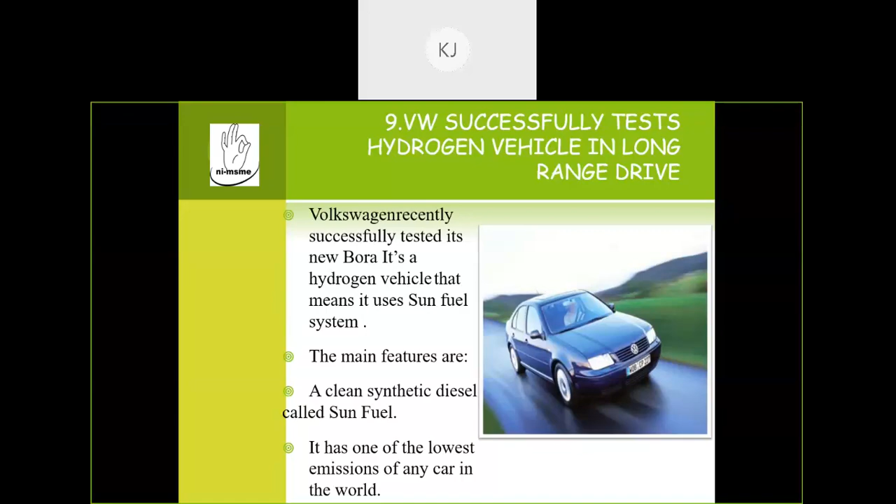Volkswagen successfully tests a hydrogen vehicle in a long range drive. Volkswagen recently successfully tested its Bora, a hydrogen vehicle, meaning it uses the sun fuel system. Its main feature is a clean synthetic diesel called sun fuel, giving it one of the lowest emissions of any car in the world.